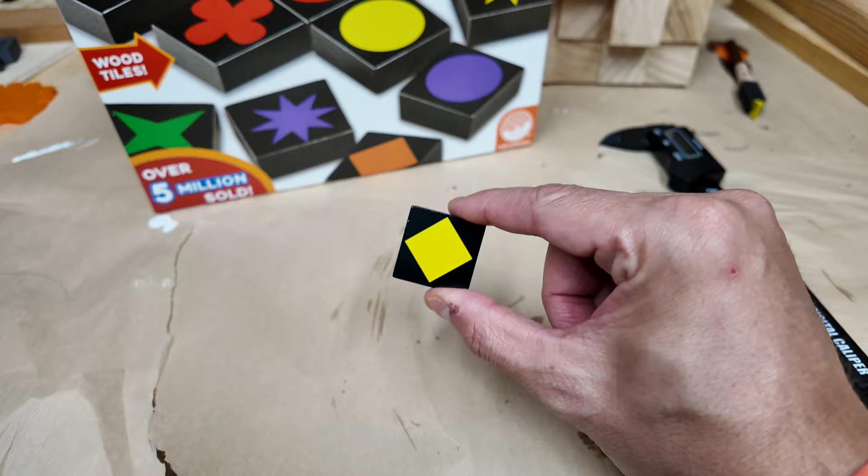I'm not going to go over the rules of Qwirkle, because that's not what we're doing here, but what I do want to talk about is these little tiles, because you're not supposed to let people see them. The game doesn't come with any way to hold them other than like this, and it's real easy to knock them over. You're going to have 6 in your hand at a time, so it can be a mess.

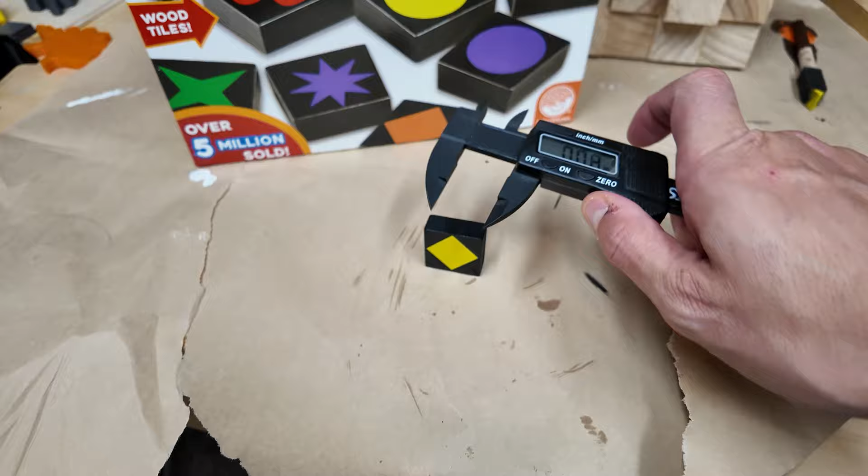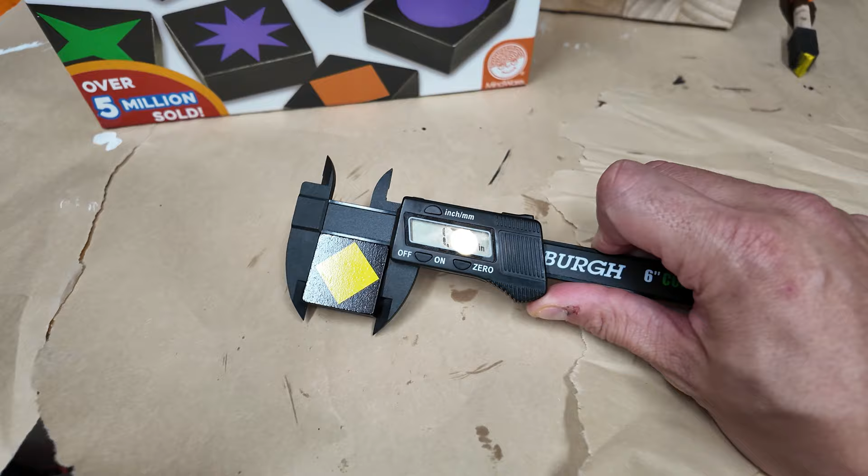So I'm going to grab my cheapo digital caliper here, and we're just going to measure these pieces up. We get 1.23 inches. If we rotate it and do the same thing, it's probably going to be close to the same measurement, 1.22. And then we have to worry about the thickness as well. We'll slide that in there, and we get just under a half inch. Those measurements are going to help us out in designing what we want to do.

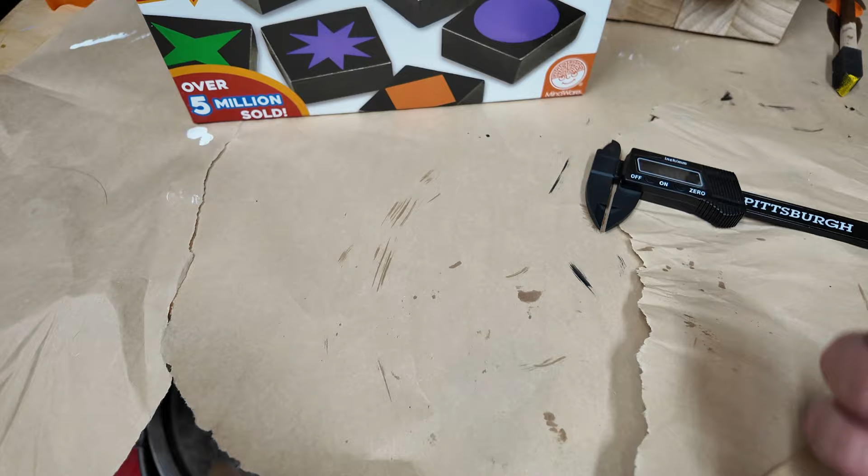The idea here is that I want a way to store these so the player can see them easily, but nobody else can. I don't know the angle we're going to have to put that at, if it's going to be laid back like this, or have to be more straight up. And also if we want all 6 going across, or 2 sets of 3. We'll figure that out as time goes on, but this at least gives us a starting point.

There's a ton of these tiles, so we need to make sure that we have what we need, and then we can do stuff with it.

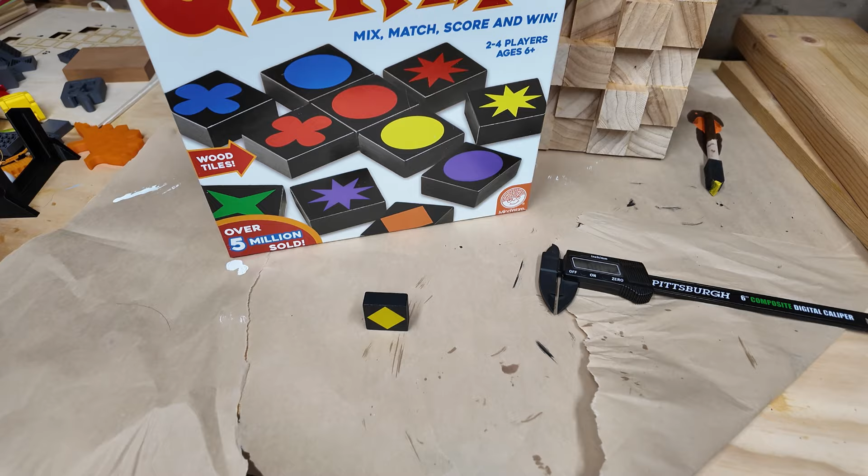Alright, so we're here in Onshape. We're going to go ahead and try to model a solution. I basically have 2 ideas. One is going to be like a staircase that has 2 rows of 3, and the other one is the same thing, it's just 1 row where it's a set of all 6 going across.

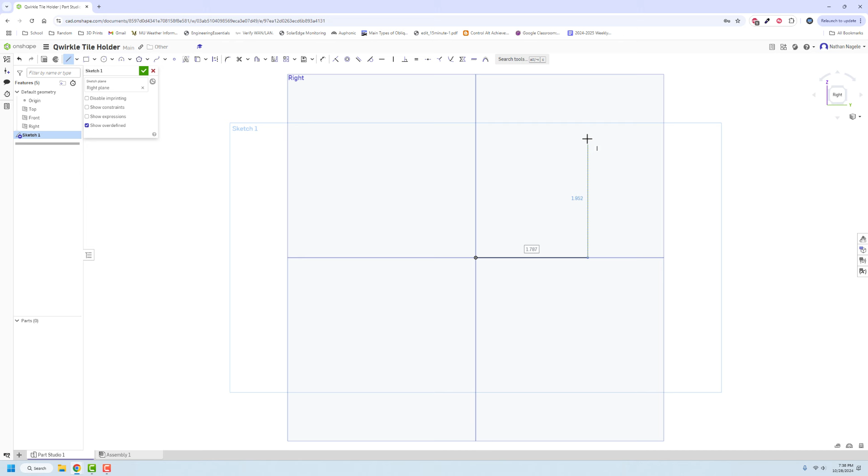I think we're going to start off on the right-hand side here, and we're just going to rough out some general shapes. So we get a right angle in there. I don't want that to be perfectly pointy at the top, I want it to have a little spot in there, and then a little space for that, and then we'll have another one go down like so, maybe to like there.

It'll flatten out and go in like that. There is absolutely nothing dimensionally right now that makes any sense with this. We're going to have to try to get some of that stuff in there. I don't know how I want to do this quite yet. The blocks themselves are basically about 1.25 inches by 1.25 inches, and about a half inch thick.

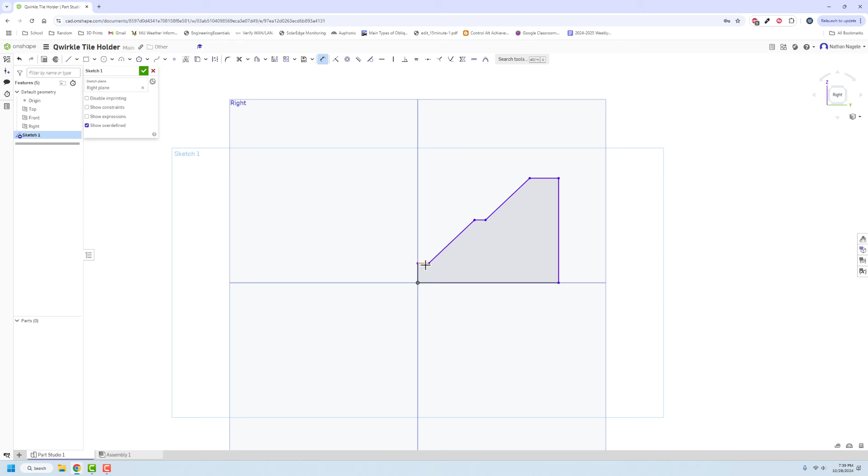So I'm going to set these flat areas equal to each other, and these angled areas I'm going to set parallel to each other. I just also want to make sure we have that there, and I got to figure out what exactly we're going to do with this. We know it's about a half inch, so I'm going to dimension these guys to be just a little over a half inch, maybe like 6/8 or 5/8.

Oh boy, that made it a lot bigger. And then we know that dimensionally this line here really only needs to be about 1.25 or so. It could actually be a little shorter to get them in there easier, and we're going to set those equal to each other as well. Then we can play with this a whole bunch more, but that at least gives us a starting point.

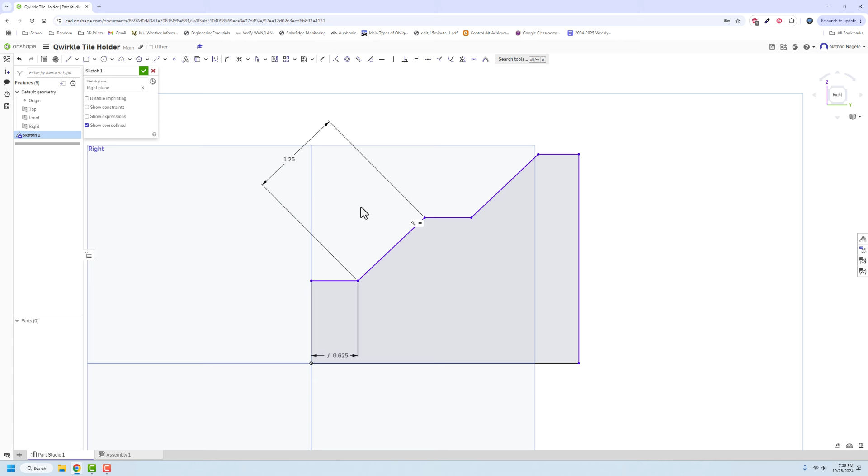I don't really like angle dimensions like this, I usually like to make stuff straight on, but I think for this one it's going to be okay. Let's see, what do we want to make this? Maybe like 5/8. And then our total height here only needs to be about 1/8 of an inch.

And then that means this bad boy here. Do I have a dimension for that? Oh, I can play with that dimension, but I thought I had everything set equal to each other. So let's just go in and set equal, equal, equal, equal. Oh, I need to set my angles on there. My bad. All right, let me go close.

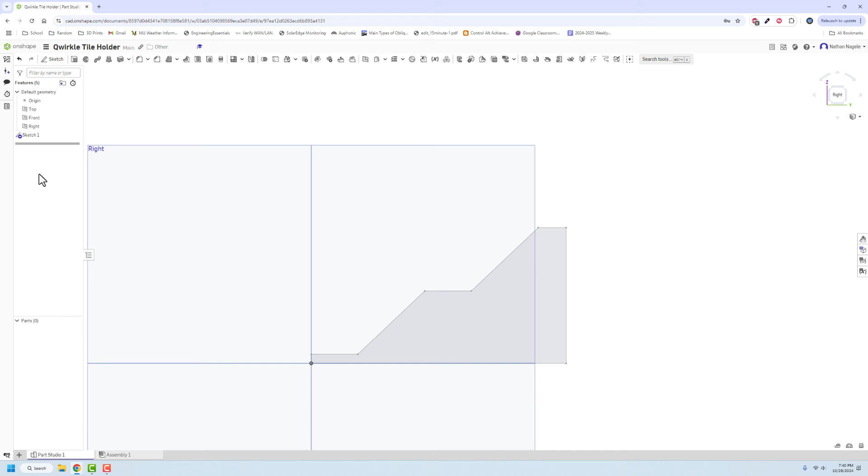Oops, didn't want to do that. Let's go edit this sketch here, and then we'll dimension this to that. I don't think 45... maybe 45 degrees will be fine. And now we have all of that stuff locked in pretty nicely.

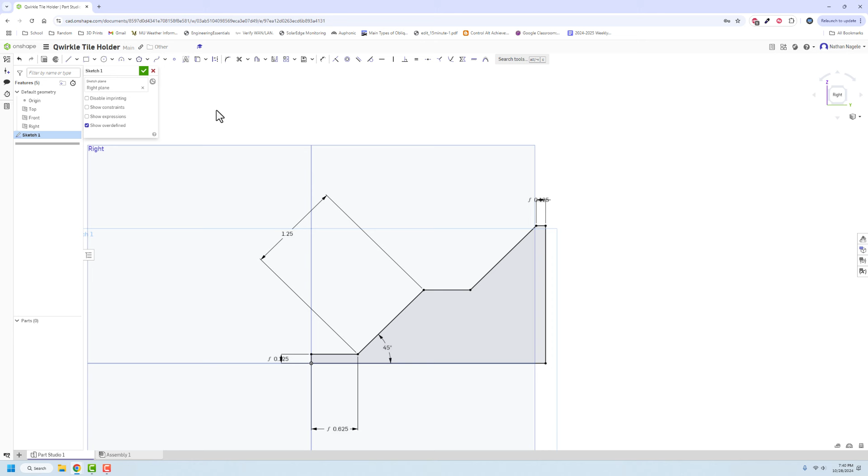I might change this to 1/8 of an inch because it doesn't need to be more than that. The tile should lay back on there, no problem. Then I can finish my sketch, and I can go ahead and extrude this entire thing.

So we know that each of the tiles is 1.25 inches, and we're going to multiply that by 3. So that's going to be 3.75. I want to just make it 4 inches, or 3.75, excuse me. So we have that, and I'm cool with that.

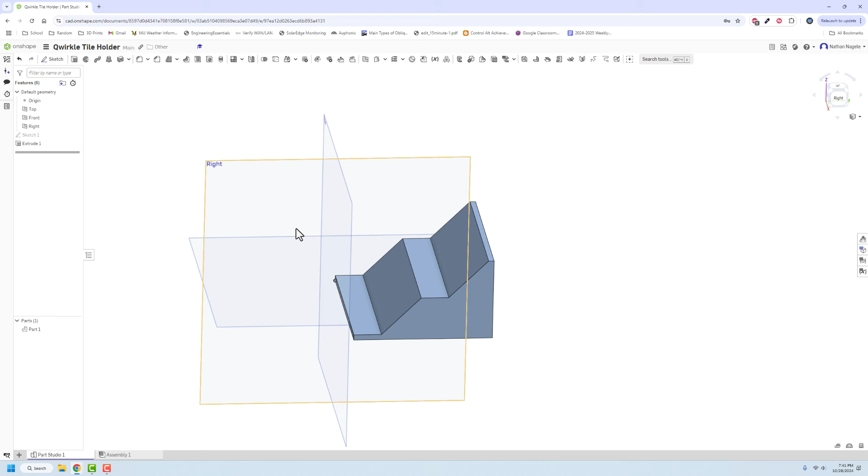And the last thing I need to do is just put a little bump stop on there so these things either sit into this, or there's just a little catch on there. I think a little catch is going to be the faster, easier, and more reliable way, so you don't have to pick stuff out of this.

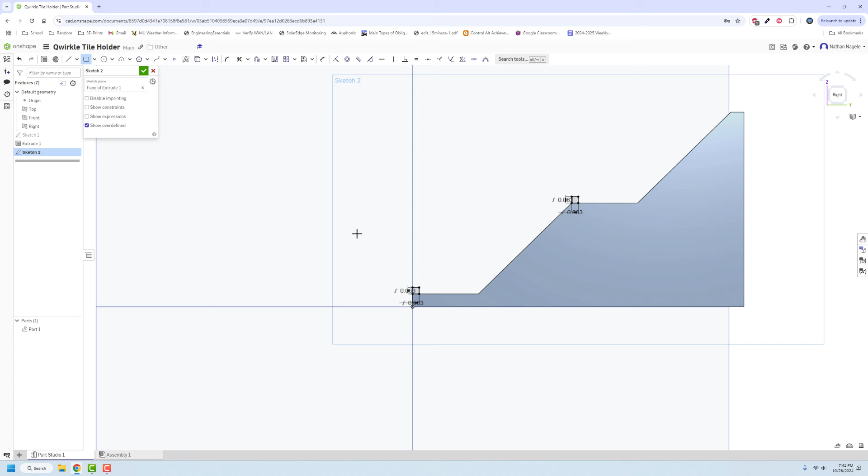So I'm going to draw a little rectangle over here, and it's maybe just going to be 1/16 of an inch by 1/16 of an inch. And we'll do the same thing over here. I don't know if that's going to be big enough or not, but we'll play with that and see what the deal is. They're all set where they need to be.

And then I can just extrude those two spots. We're going to make sure we add them on as new pieces. We'll switch direction, and instead of a distance here, we can just say up to face, and then we can click on the face, and it'll go all the way through like so.

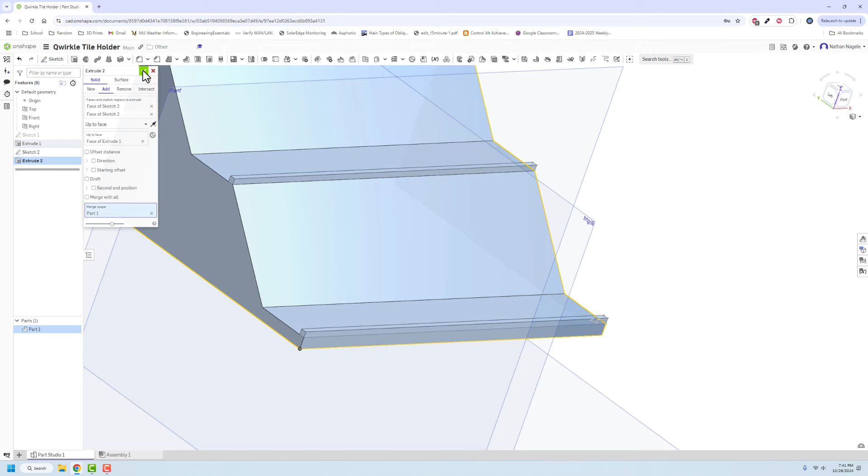All right, I'm relatively happy with that. Now we just need to go in and put some fillets and chamfers and all this stuff on, so it's not hard edges that we're dealing with.

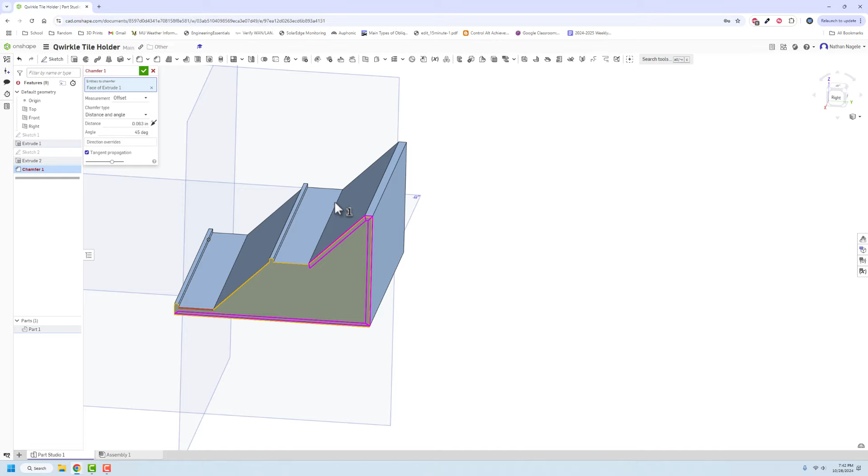So I think we're going to chamfer all of this one just for funsies. We'll do a 1/16 of an inch, and that should knock off most of the things we need to be concerned about here. So we'll do it there, there, here, here, here, here.

And we'll probably put it on the front there as well. Might as well put it on the back, why not? And the only one we don't have it on... okay, let's just see what this looks like real fast.

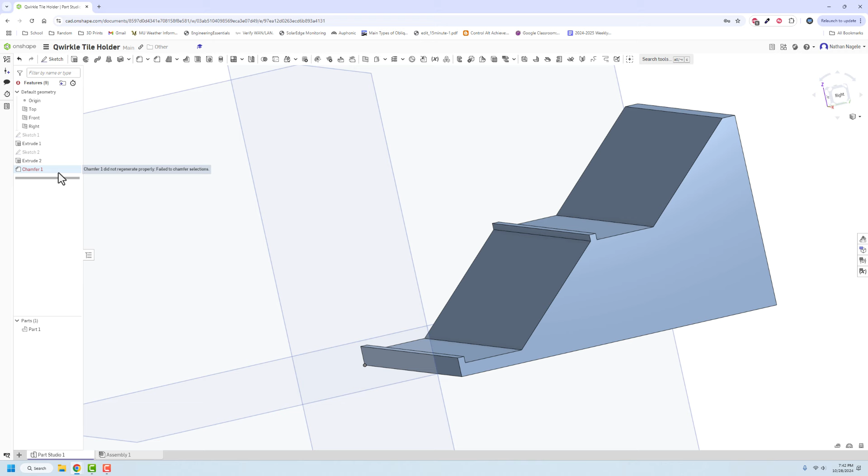This is one of the things that Onshape can do sometimes—it's not Onshape's fault, but sometimes it just doesn't like to process too much information at once. So I'm just going to slow it down. You see how we have these blue areas there? That's giving us errors, so we're going to delete that for now.

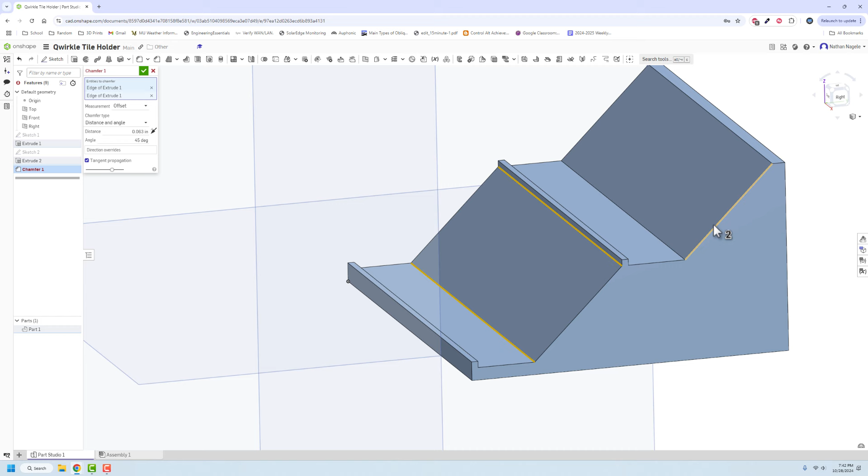And then we're just going to go in when we do our chamfers and add it on to the spots that we know will work. One of the problems with chamfers here is when we're dealing with angled areas like this, they don't really show up too well because it's just not set.

So I'm actually going to delete all of that. Let's go and try fillets because we already have angles. We're going to do a 1/16 of an inch again, and let's see here.

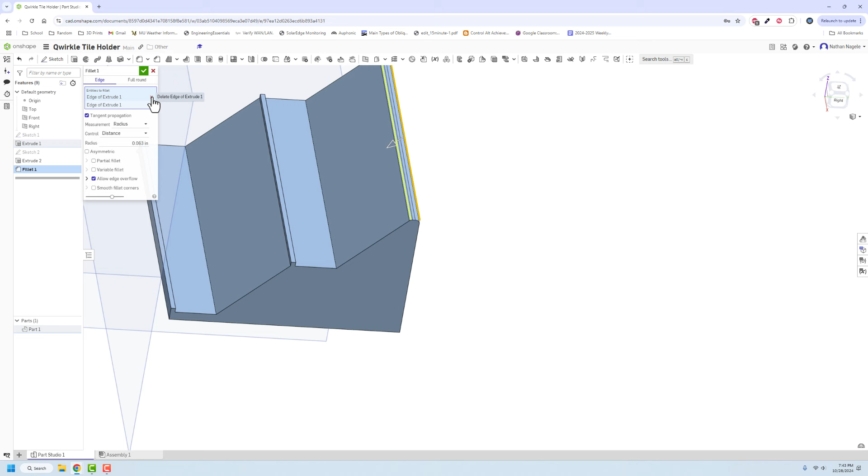There we go. See those fillets coming in? So I'm going to delete those for now. We're going to round all of that over. And this one still gives an error message, so we're going to ignore that bad boy.

And we're just going to try and see if we can round some of these hard edges over. Yeah, see, that one's going to cause us problems, so we'll come back to that one later.

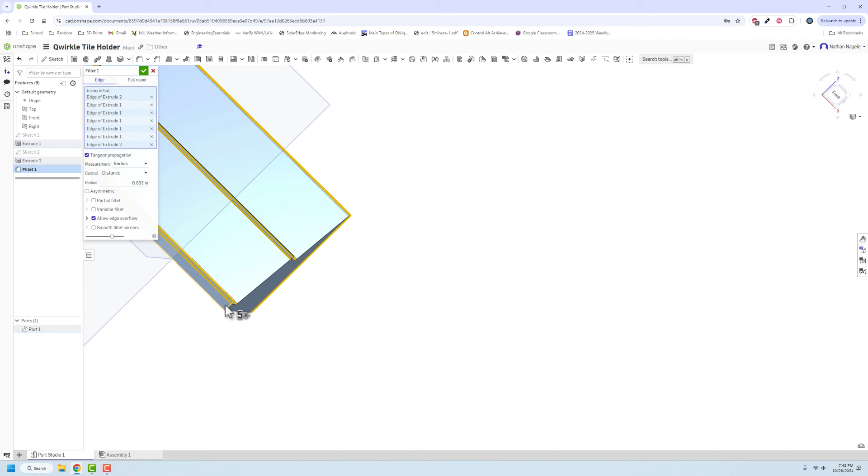And can I get that one? I can. Let's go over here and get that one. Beautiful. Let's see, can we get that? Nope, that one's going to cause problems, so we'll get rid of that.

And I guess we need this back line here. Okay, that's a start here. And then I just want to try to round off some of these other edges on there. So we'll try that real fast.

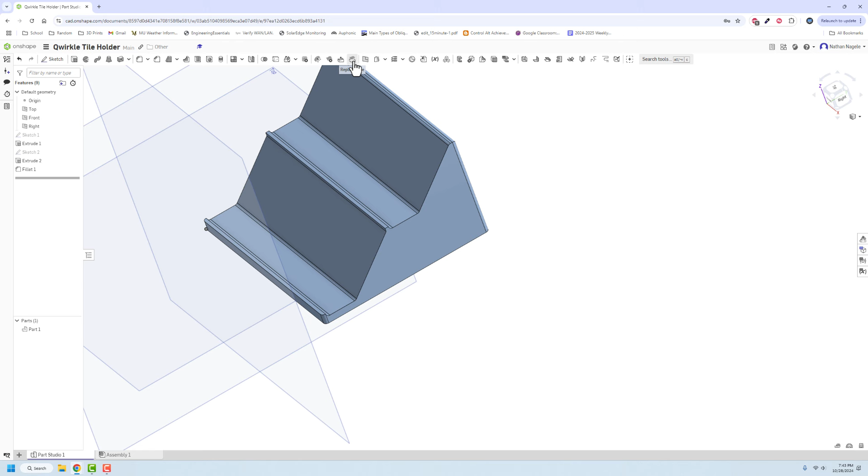Go into fillet, just select these, and you can see how now that some of the other steps have been taken care of, it's totally cool.

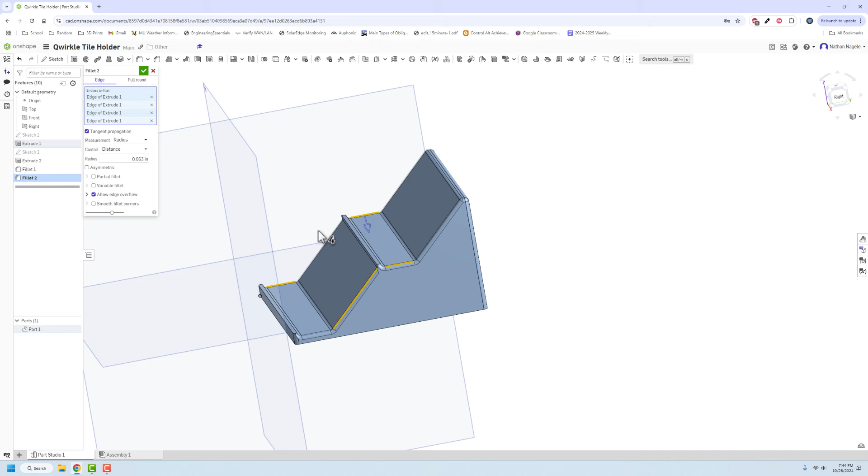I'm not entirely used to that compared to some of the other drafting software I've used, like Inventor, which allows you to just go ham and select everything and it will fillet whatever and do its thing, and that's awesome. But that's not the case here, so that's okay. We just need to make sure we know that, and we'll be all right.

Now, I think we have all of that stuff. Cool.

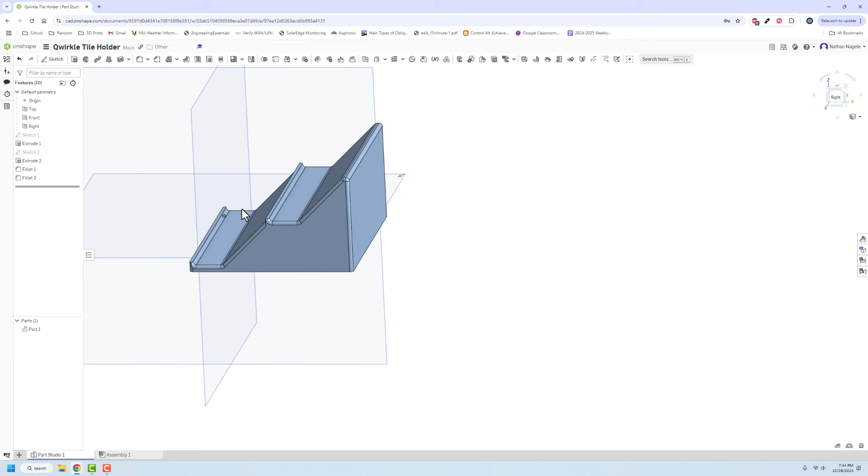And it should hold all of those things. I may need to make these little bump ups a little bit bigger. Honestly, I could also hollow a lot of the stuff out and make it easier to print overall, but I'm pretty cool with that.

So let's really quickly go over to our measurement tool and measure how big this thing is. It's 4 inches. We know that because that distance is a little over 3, which is fine. So we're going to export this and throw it into the printer to see what happens.

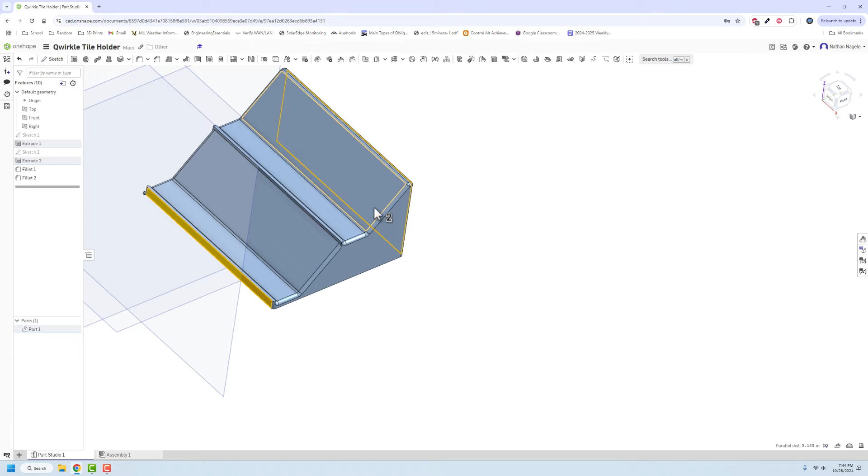After throwing that into the printer, it's not too big of a deal. It's just over an hour with all the prep time. So an hour print, I don't have it set going crazy. The only things we did were change the infill to adaptive cubic and set the infill to 10.

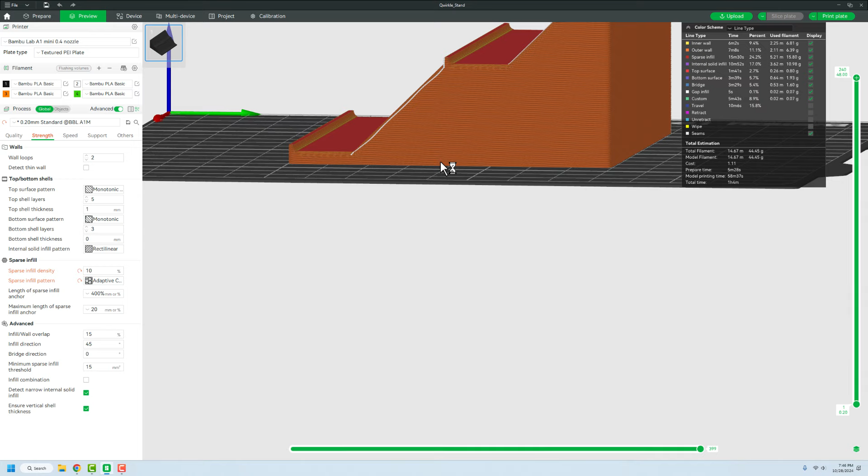It's holding up these little chips of stuff. It doesn't really matter, and I'm only a little concerned about this area here - not that the print's going to hold, but that it's going to hold the Qwirkle piece. We'll see if that's the case or not.

I feel like these landings are a little big, so we'll figure it out. What I probably should have done is, instead of printing this whole thing, turned it up vertically and just printed out a slice of one just to see if it's actually going to hold.

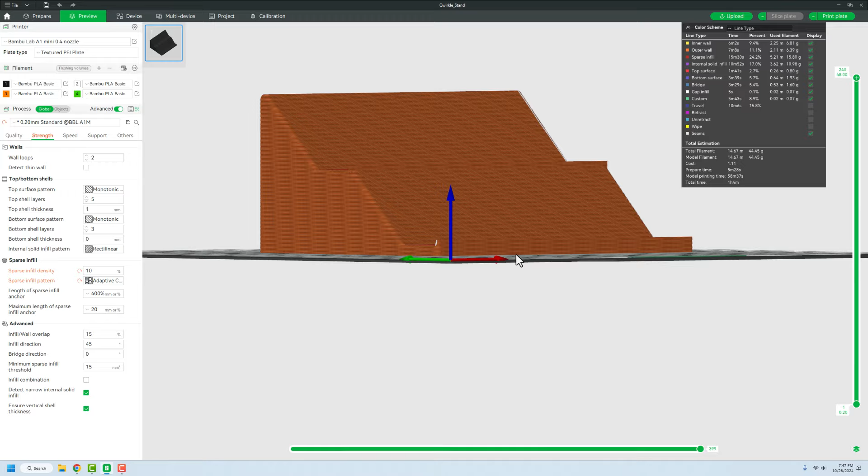But as this is building, once it gets to about here, I'll be able to put one on and make sure that it fits. And then if it does, we'll just keep the print going. If it doesn't, we should be okay.

You can see it's nothing too crazy - it's a relatively easy piece to print. It's going to print nice and flat and just go in and fill in like that and do its thing. So we'll be back once we have a chance to have it printed and see what the final result is.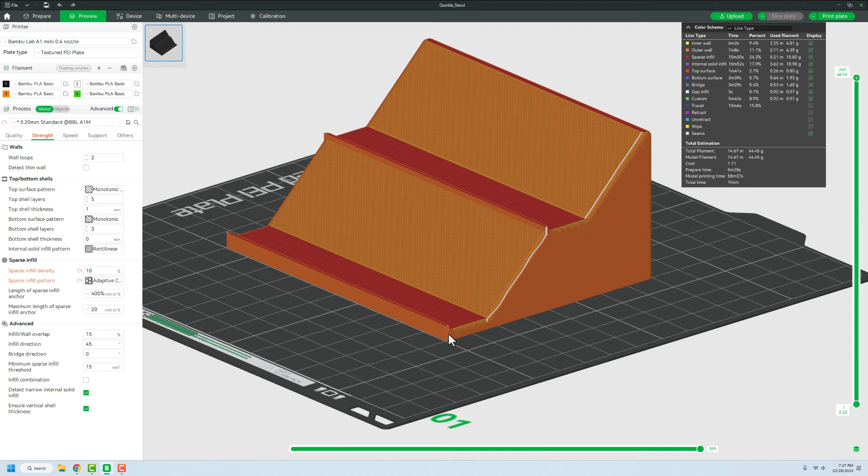So because I'm me, I also made a couple other versions. This is the original one. I think it's a little big, and I think this angle is not quite right - it should be up more vertically.

So I did this one, which is much more vertical. However, this one takes about a half hour longer to print, and I also just don't like how it looks. It also takes up, it's just huge - I don't like how much space it took up.

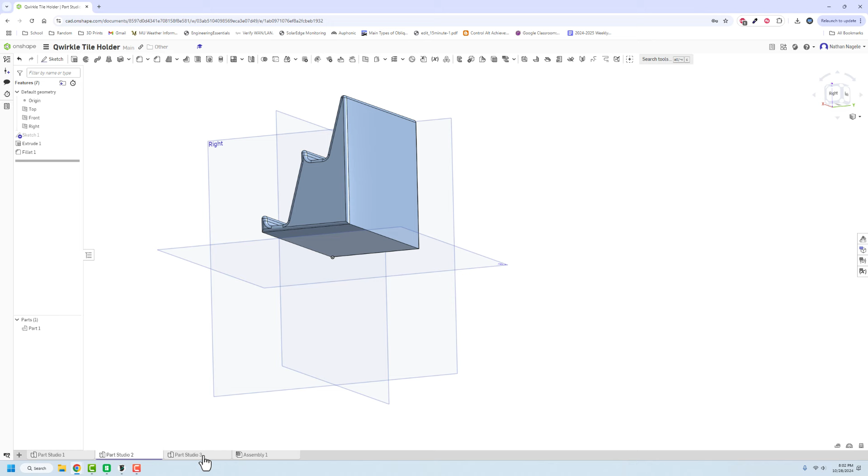So then I went back to the absolute basics. Here's just one that all 6 will fit in. It's not real tall. This angle here is 1 inch so that you can grab them from the top as well, so the entire tile is accessible by the fingers at the top.

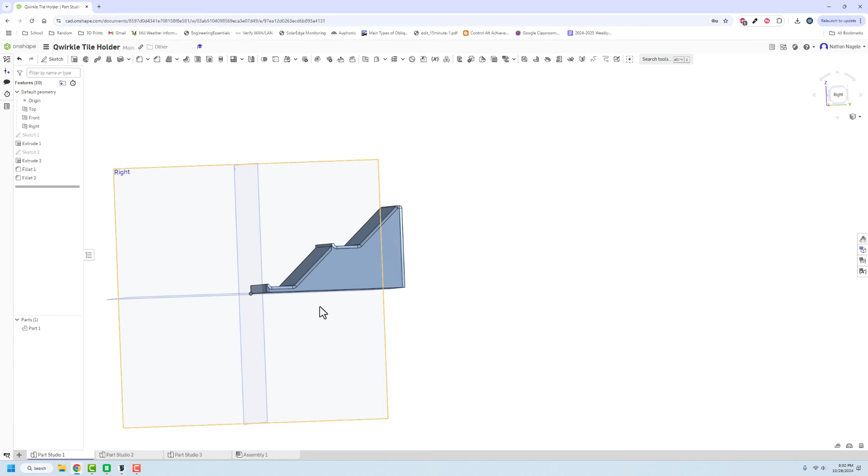So I'm going to print this one, and I already have this one going. This third version here, if we take a look, is only a 38-minute print, so I'm pretty excited about that. We'll see what happens between the first two, and we'll have a winner and print the rest of them for the family.

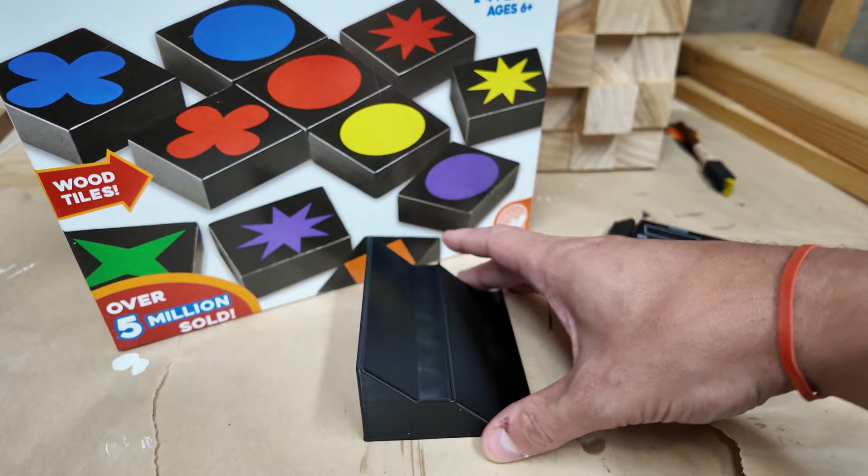So the one that fits 6 had a print error, and I'm not going to wait to get it. This guy works, not bad. The ridges here, or the spacing here, is a little too large. What happens is I get it on there, and it falls down. So we wasted some space there.

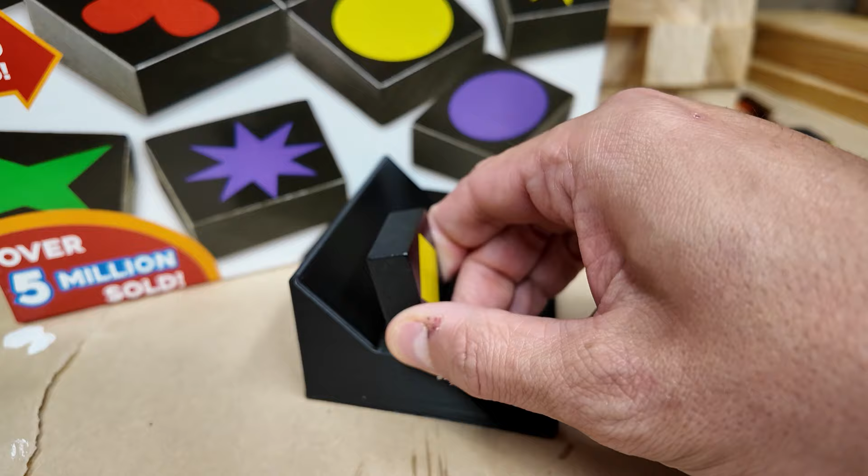Probably a steeper angle would hold those in. It only needs to lean back maybe like 15 degrees and be fine. This one's at 45 and it's just way too much. But what I like about it is you can set them up.

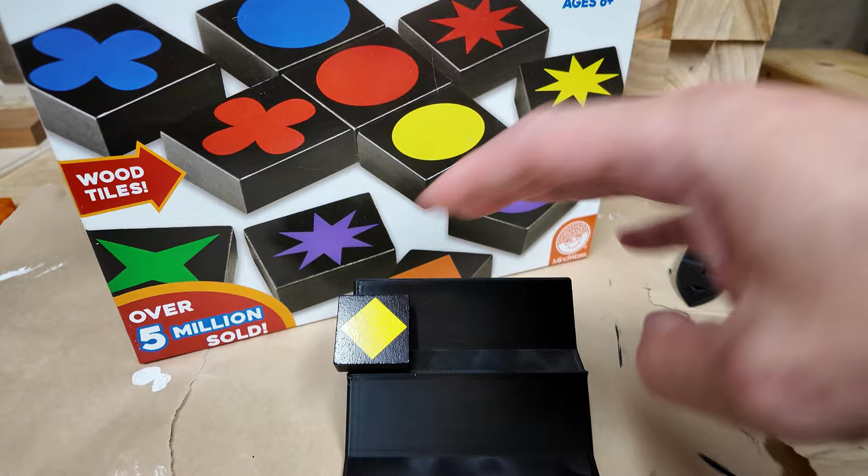They're easy to read. You can't really see them if I turn this around, and the camera's above where it's at, so it's going to be a little more obvious. But you can see you can't really tell necessarily what's there - you get a little bit of the color, but you can't get the shape for sure.

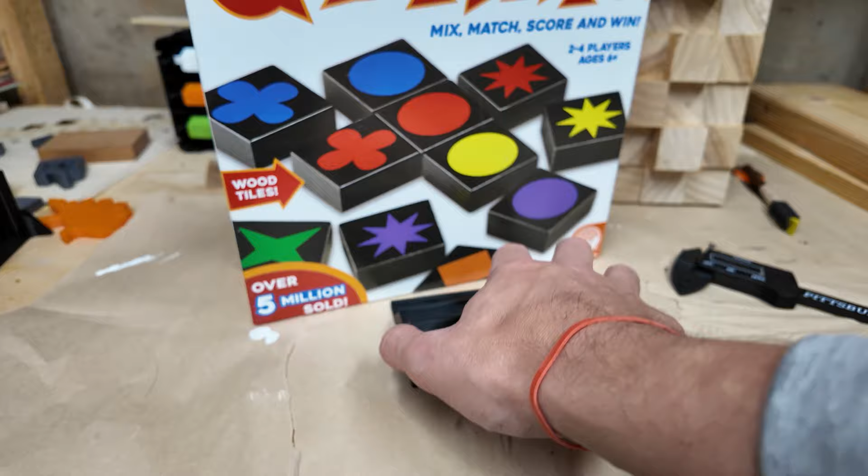So yeah, I would definitely make the angle a little bit more and then go through, and maybe I'll do a follow-up video with a better solution. This is okay, but it needs to be better.